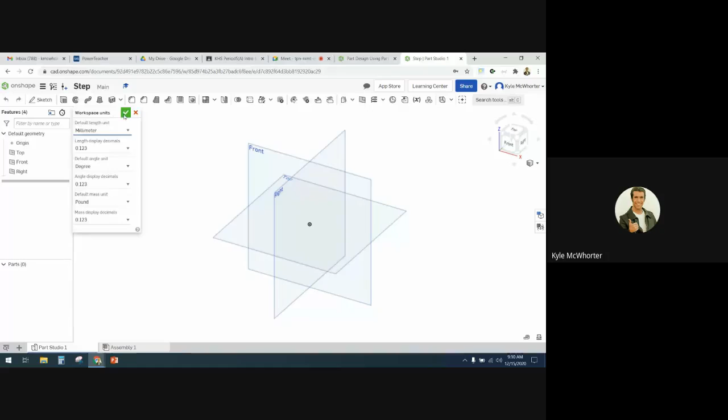And then I'm going to create a new sketch on the top plane. So top plane, new sketch. I'll push N for the normal view. And next slide.

So next we're going to sketch a center rectangle whose center is coincident to the origin. And then we're going to create a construction line diagonally from the bottom left corner to the top right corner. And then we'll add these dimensions. Then we will accept the sketch, make sure it's fully defined, and rename it main sketch.

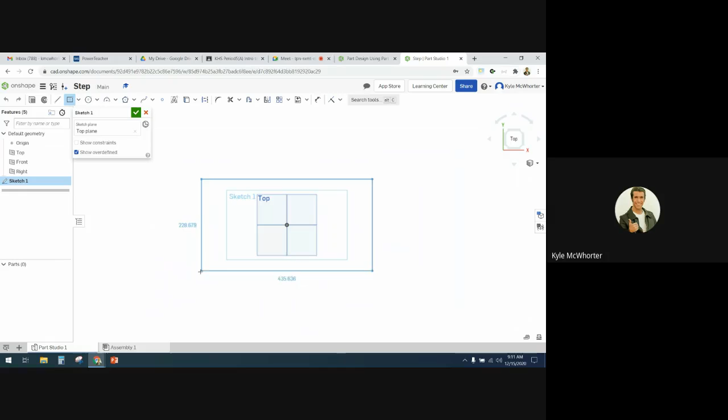Okay, so center rectangle. That's going to be in my little drop down, center point rectangle, or you can use R. So click on the center, then drag to make your rectangle. All right, there's my rectangle. Then I'm going to make a construction line that goes from the bottom left corner to the top right corner.

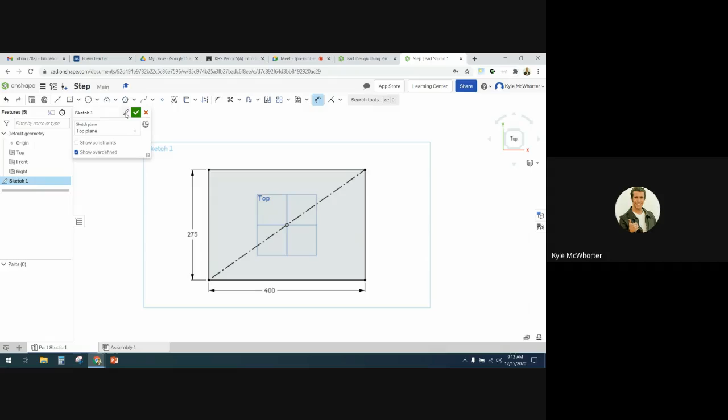And then I need to put some dimensions on there. A height of 275 and a width of 400. 275 there. 400 there. And everything is defined. So I am going to accept the sketch, but rename it main sketch. So I'll rename it main sketch and accept.

Next, we're going to do an extrude from the rectangle sketch. Make sure it's a new part. We're going to select the rectangle. We're going to do a blind end type, a depth of 40 millimeters, and then we're going to do a 5-degree draft, and we want it to be drafted so that the top is smaller than the bottom. Okay, so let's do this. 40 millimeters blind with a 5-degree draft that makes the top smaller.

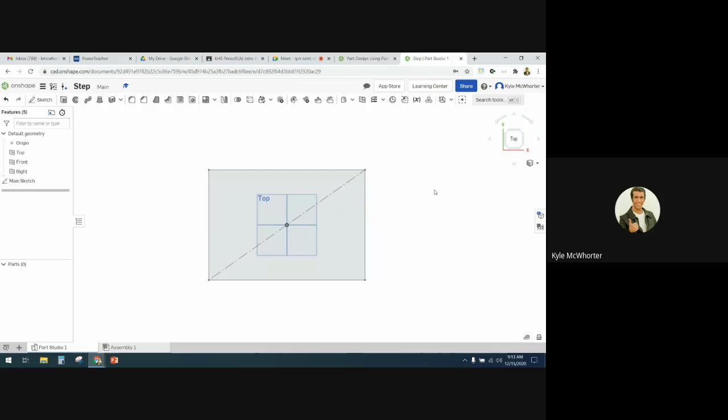Okay, so back over here. Hide these. I'm gonna do an extrude. It's new, it's blind, it's gonna be 40 millimeters. What face? This rectangle. And I'm gonna do a draft of 5 degrees.

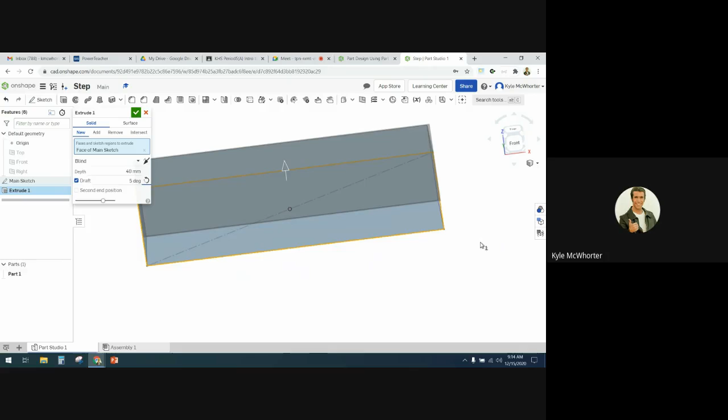And then if I'm looking at the preview right now, the top is up and the top is bigger. We wanted the top to be smaller. So I need to hit this to reverse the direction of the draft. So now it's drafting inward so that the top is going to be a little smaller than the bottom. Just check and make sure we got all the things we needed.

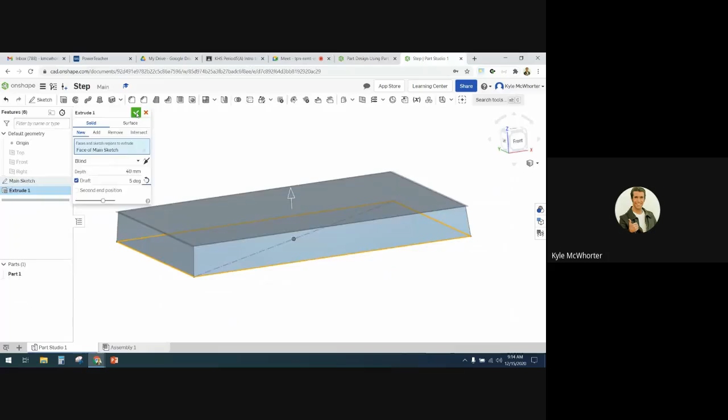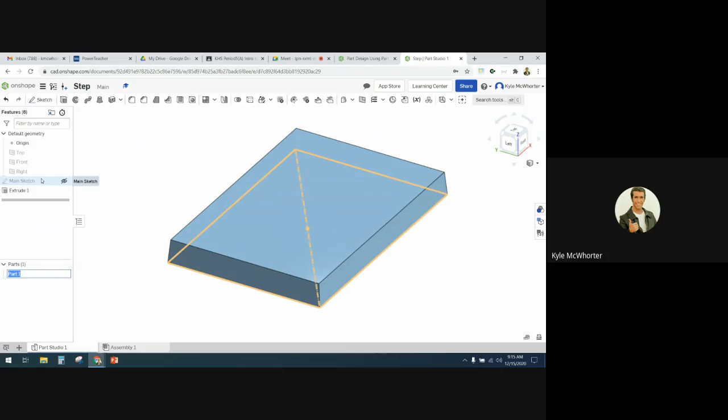So I am going to accept the feature. So now, if we look at a straight on front view, you can tell that the top is a little bit smaller because of the 5-degree draft. All right, what's next? We're going to rename, instead of part 1, we're going to call it step. So we're going to right click on part 1, rename, step.

Next, we are going to fillet the 4 vertical edges of the step with a 15 millimeter radius. So just the 4 vertical edges there. So I'm going to get my fillet tool. It was a 15 millimeter fillet. And then I'm going to select the vertical edges. Then I'll have to rotate my view to get to that last edge. Got those 4 edges selected. So I'm going to accept that fillet.

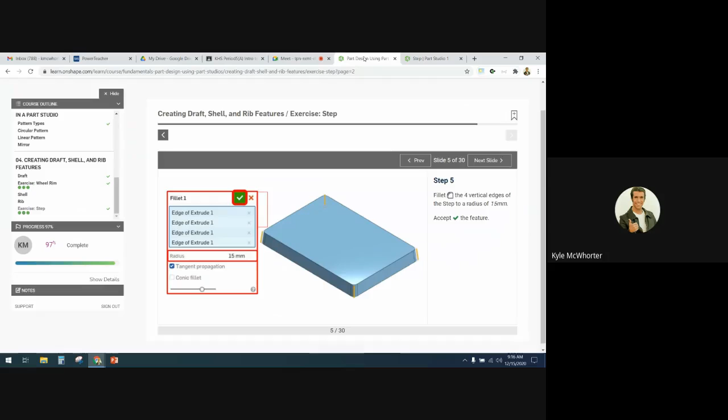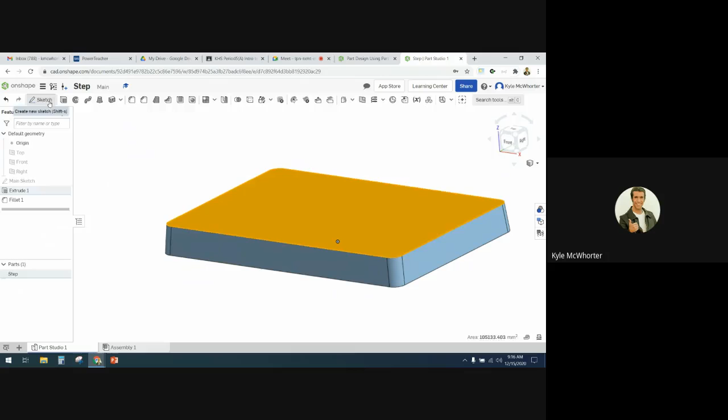Next, we're going to make a cut on the top face so that we can make a pattern for the traction. So we're going to start a new sketch on the top face of the step. So I'll click on the top face, then click on sketch, and now I have a sketch plane on that top face.

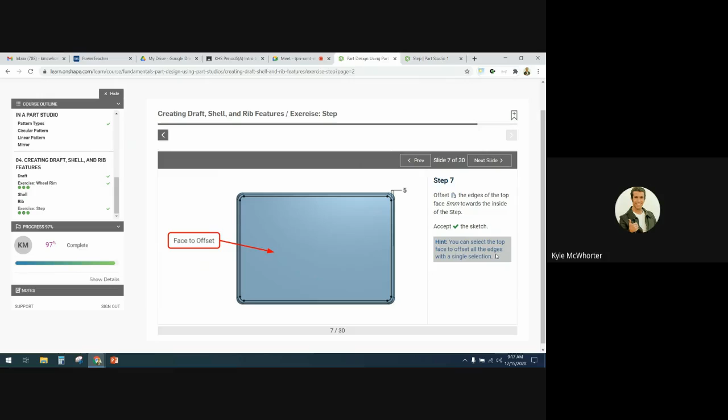Next, we're going to use the offset tool to make an offset 5 millimeter towards the inside of the step. And their hint is you can select the top face to offset all the edges with a single selection. Okay, so here's the offset tool. Click on offset, and then you can click either on individual lines, or you can just click on the whole face, and it will offset basically that whole edge all the way around.

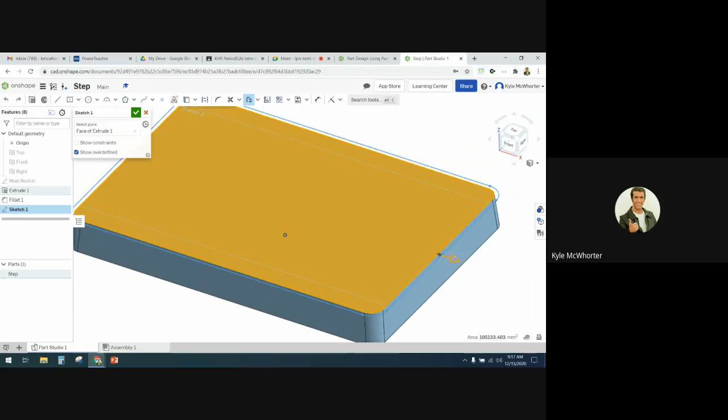Right now it looks like it's offsetting to the outside, so I want to switch the direction. So I can click on this little arrow right here, and it will change the direction. And then zoom, and it looks like it's already 5 millimeters. So we're good there. So we've got this offset, the outside edge here, we offset it in 5 millimeters. What's next? Accept the sketch. I accept you, sketch.

Next, we're going to do an extrude to remove the profile from our last sketch. We're going to cut it down 5 millimeters deep. Make sure we have the merge scope set to step, 5 millimeters deep, it's blind, and we need to set it to remove.

So now we're going to do an extrude. We want to remove. The depth is only 5 millimeters, and the face we're going to extrude uses this sketch right here. When I select the whole sketch, it looks like it includes the outside edge too, so I'm just going to select the inside edge.

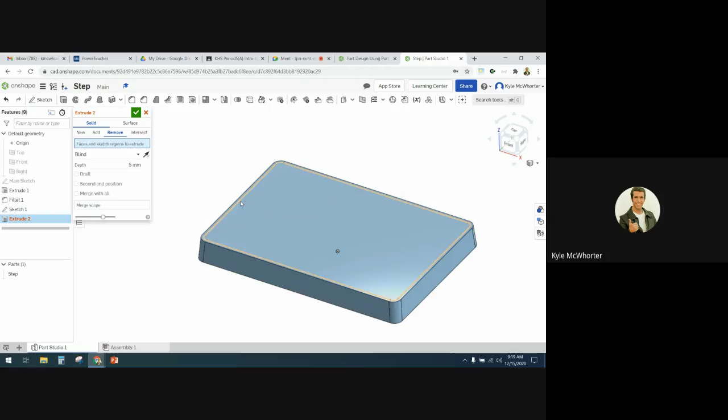So that gives me a preview. It looks like it's cutting it down correctly, with a depth of 5 millimeters. Merge scope is step, so I think we're good. Let's double check. Yeah, so we can accept that.

Next, the step is going to be manufactured as a plastic part, so we need to hollow it out and have a constant wall thickness. We can use the shell feature to do that, and we set the wall thickness to 2.5 millimeters. Make sure we're removing the bottom and not the top.

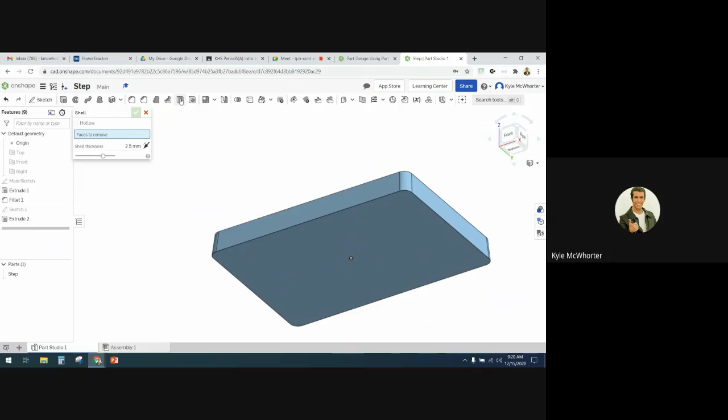Rotate it so that we see the bottom. Then here's the shell function. What face do I want to remove? The bottom. How thick do I want my shell? 2.5 millimeters. And now we've got the bottom of the step shelled out like that.

Next, we're going to create ribs for traction on the top step. So we're going to create a new sketch on the indicated face, which is the top edge, the very top face of the step. We're going to create a sketch plane there.

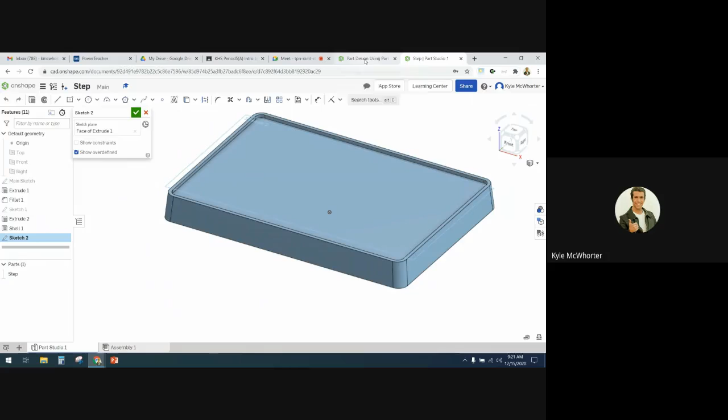Okay, I want to get my view rotated back to somewhat normal here. Here we go, there's top, front, right. I'm going to zoom in so I make sure I'm selecting the top edge there. I'm going to make a sketch plane on that edge, and then I'm going to just sketch a little line.

I want to show my main sketch and add dimensions. I need to use the main sketch to refer to things for my dimensions. Like this angle is going to be to the horizontal edge here, a 45-degree angle.

The 22 millimeter dimension is between the end point of our construction line and the line here. We've got to make sure we do that dimension from this point to that line, because if we click on this point and then that point, you could be measuring in a different way that lets this point be further away. So when we do this dimension, the 22, we need to click on the dot and then the whole line.

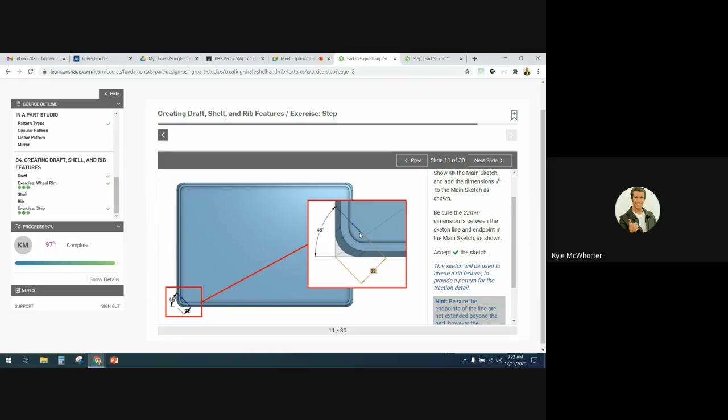Okay, so we need to make a little line. We need to show the main sketch. So I'm going to get this view, zoom in a little bit, show the main sketch, and make a little line.

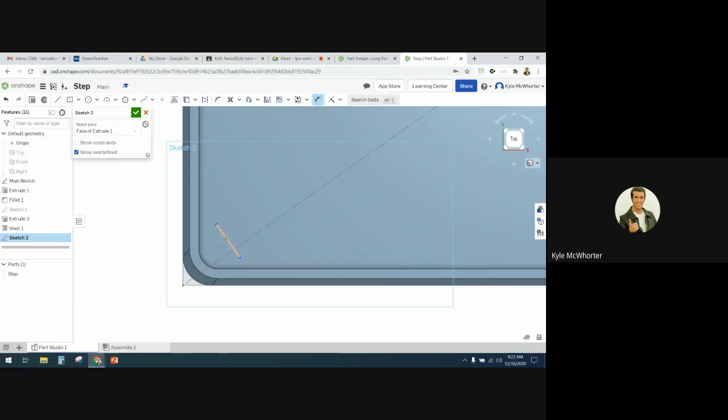And then I'm going to put some dimensions. I'm going to say I want the angle from this line to that line, the angle between those, to be 45 degrees.

And then I'll try to demonstrate what I was talking about before. If I put the dimension from this point to this point, am I just measuring how far they are from side to side, or how far they are in this direction? What direction is it in? And then when I place that dimension, does it do what it was supposed to do?

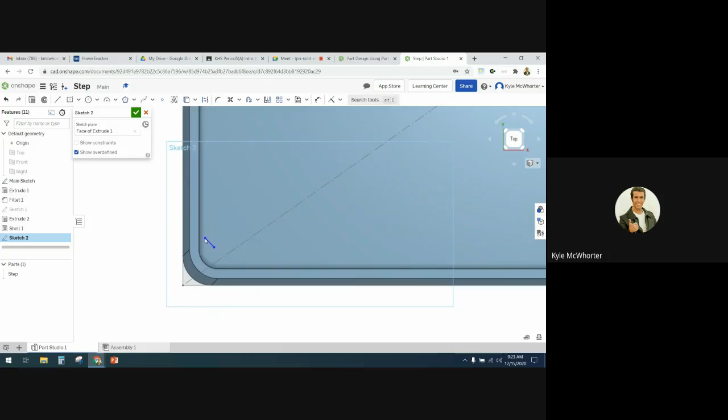Like right now, I can move this way far away. It's not stuck, because only this point here has to be 22 millimeters to the right of that point. So if instead of doing that dimension like that, I say I want a dimension from this corner point to this segment, then it will choose the perpendicular distance, and that's the one we set at 22.

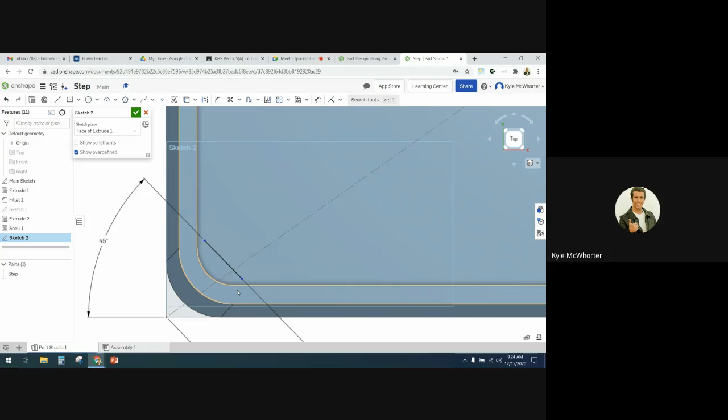And now you can see that point can't really move the line segment. All I can do is stretch the end points. But the angle and the distance away for that line are already locked in, because we did our dimensions right. So make sure that you dimension from the point to the line.

Okay, so now this is going to be a little weird because we're going to accept this sketch even though the line isn't fully dimensioned. The length of the line doesn't matter in this case, because we're going to use a rib feature that just uses this line as a reference for where to put a rib. This hint down here says be sure the endpoints of the line do not extend beyond the part, because otherwise the rib would go on forever. But the endpoints don't have to be fully defined, they just need to be inside, between the lines.

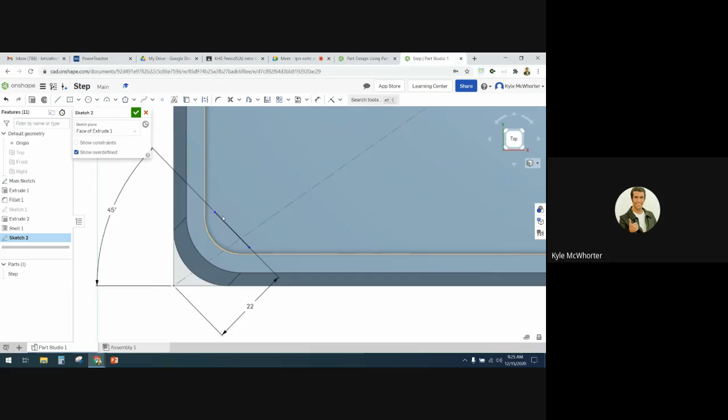Okay, so that works. I've got my points in between the lines, so I can accept that sketch.

Next, I am going to create a rib feature. I'm going to select the sketch that we created in the last step, which is just that little line. The thickness we're going to set to 10.

So right here, 10 millimeters. Choose step as the part to define the rib. Make sure we select normal to sketch plane. So it's either going to be normal to sketch plane or parallel. And we want normal for this one.

And then the last part is to check extend profile. So we'll kind of watch what each one of these things does. So I'm going to go and click on the rib feature. The sketch profile that I want to use is this line. The part that I want it to go to is step.

And then you can see that right now it's trying to shoot it out parallel to the sketch plane. So it's trying to go that away. But we want it to go normal to the sketch plane. So now it's making that rib go down to the part.

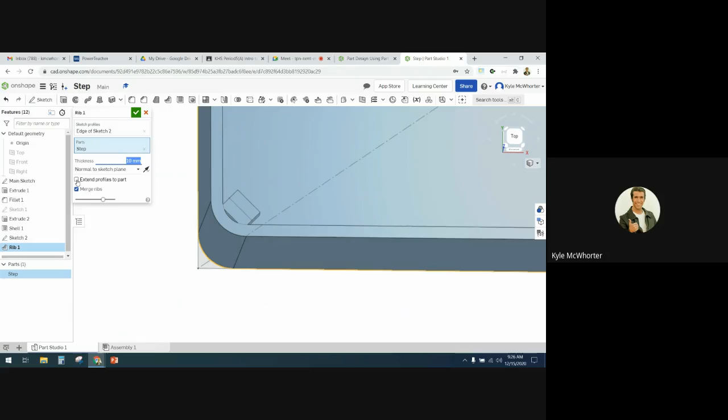We want the thickness to be 10 millimeters. And then when we click extend profile to part, it will make these ends go all the way to where it runs into the part. So when I click on that, it will go all the way over to that.

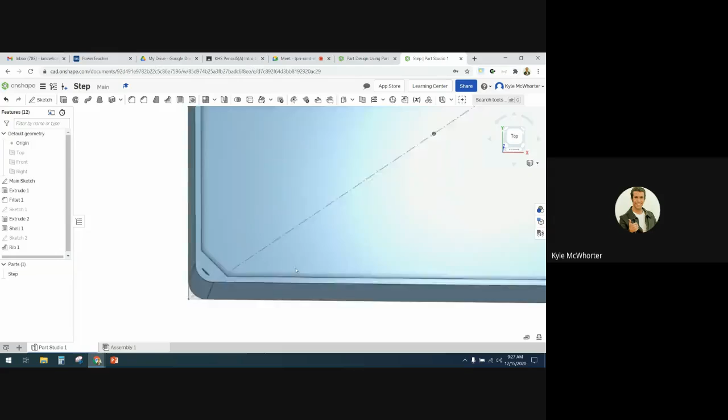Make sure that merge ribs and extend are both checked. All right, let's accept that. So now we got one rib.

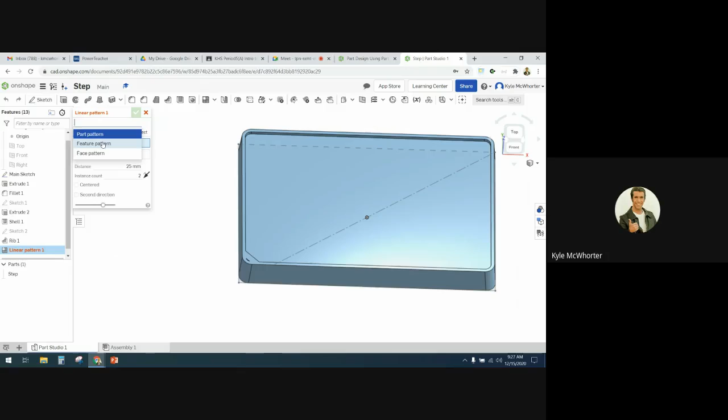Next is the moment of truth. We need to use a linear pattern. Be sure to select a feature pattern. So when we first select the linear pattern, it comes as part pattern, but we want to pattern a feature. So we need to select feature pattern. What feature do we want to pattern? We want to do this rib.

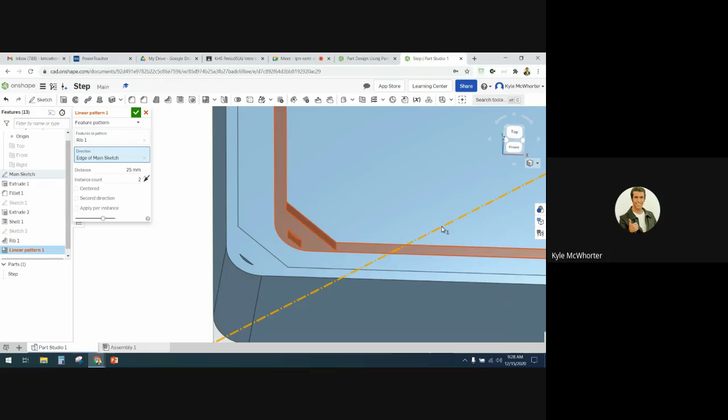No, it picked extrude one. I want to do rib one. The direction, we're going to choose this construction line. Now you see how, okay, it's trying to take the whole entire pattern. If I check apply per instance, that is the one that makes it just taking the rib.

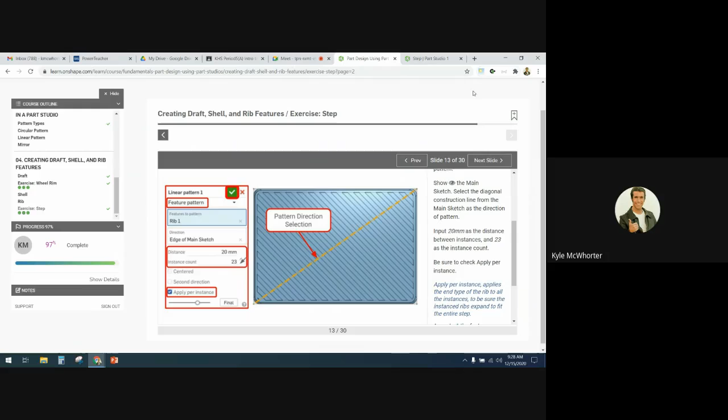The distance, and I go back over here, 20 millimeters for the distance and then 23 instances. So the distance was 20 millimeters and the instance count would be 23. Now we get the ribs. Yay, we got ribs.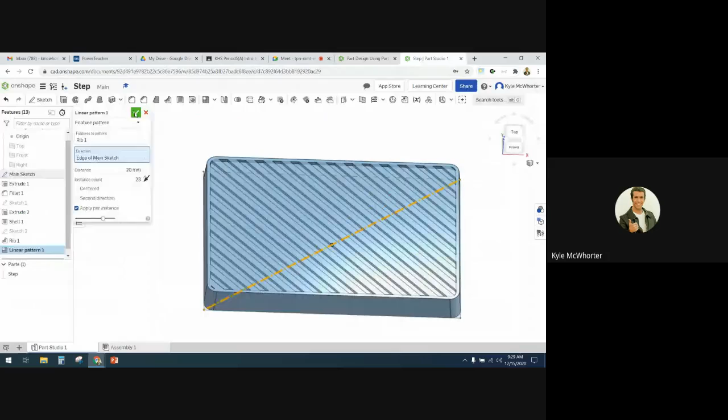All right, I think we are good with that one. Check. Next. All right, now we're going to create ribs to brace the inside of the step.

So now we're going to create a new sketch on the right plane. So I'm going to go create a new sketch on the right plane. So I'm going to go over here, click on right plane, click sketch, and then I'm going to push N, and it'll give me that normal view there.

All right, now we are going to sketch this horizontal line. So the line only goes from the blue dot to the blue dot. This right here, the rest of it, this is just an extension line showing this dimension. So the line only needs to go like from here to here. Then once we put the dimension on it, that extension line will show up. So it's 5 millimeters from the bottom edge up to where the line is.

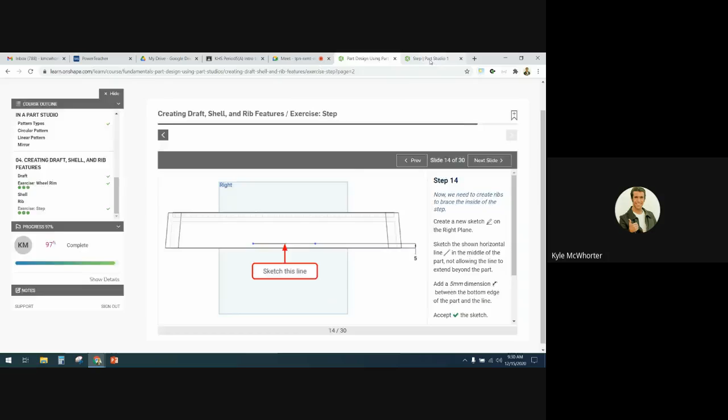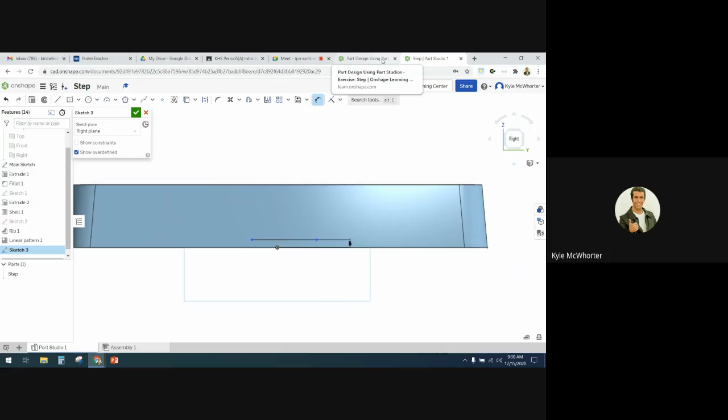Okay. So I'm going to get my line tool. And I'm just going to make a line, make sure it's horizontal. And then I'm going to dimension it and say this thing needs to be 5 millimeters from the bottom. So now we've made this line. Then we accept that sketch.

La la la la la. That's good. So we accept it. We just accept that sketch.

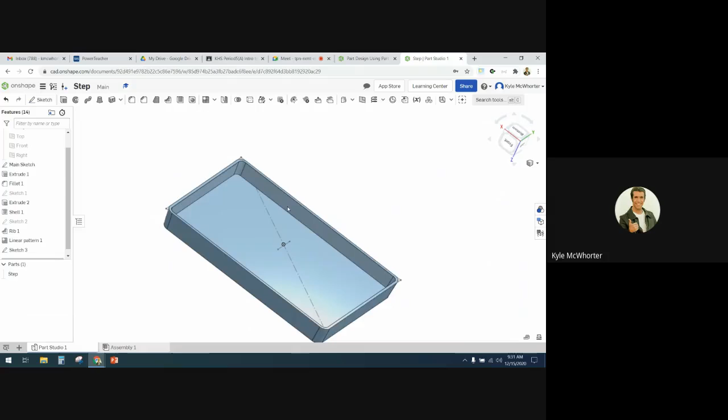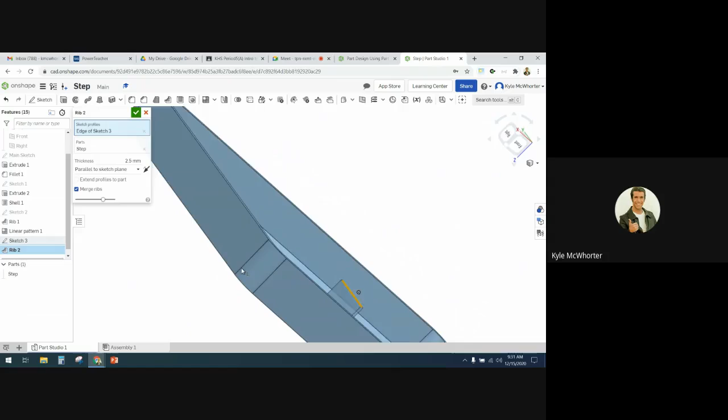All right, so next we're going to make a rib feature using that one little line. So let's flip this over. I hide the main sketch for now. But I want to take that line right there and make a rib. So rib. Then click on sketch profile will be this line. So right now this is from that line going straight down to the part.

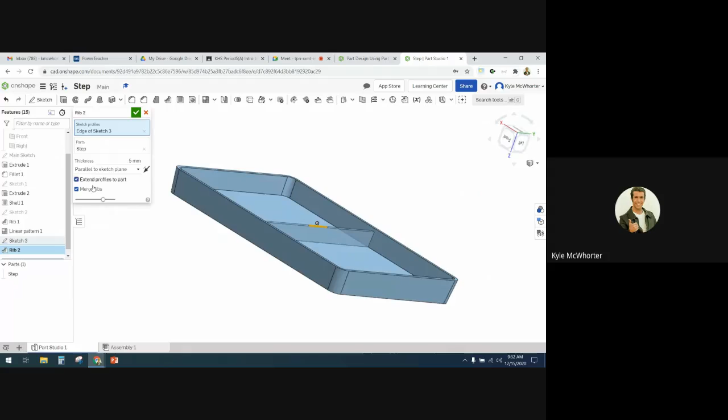The thickness be 5 millimeters. And we want to choose, this one's going to be parallel to the sketch plane and extend and merge. Okay, so the thickness was, I already forgot, 5. And extend. And now we've got this rib that goes all the way across.

Click extend profiles and extend the feature. Okay, so now we can accept that.

Next, we're going to do a draft on the rib. So we'll pick the top or the bottom edge here as the neutral plane, and then the sides as the entities to draft, and then the draft angle will be 5 degrees.

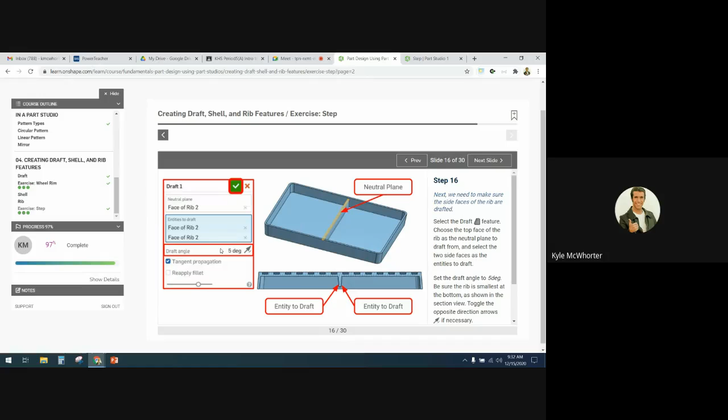Okay, so draft. The neutral plane will be this top part of the rib. The entities to draft will be this side here and that side there. And it's supposed to be 5 degrees. And it looks like it's going the right way. It's making it wider at the top.

So, ding. And then if we take like a bottom view, you can tell that it gets bigger towards what is the bottom on this view. Okay, so what's next?

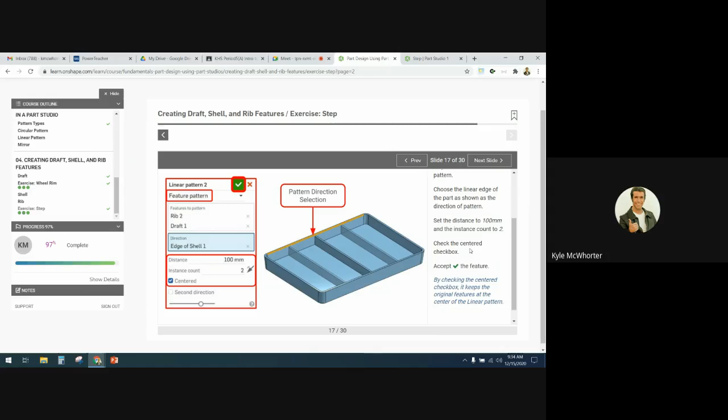Linear pattern. We're going to select linear pattern, select the rib and the draft from the menu on the left as the features to pattern, choose a linear edge of the part as the direction of the pattern. Set the distance to 100 millimeters, the instance count to 2, and check the centered checkbox.

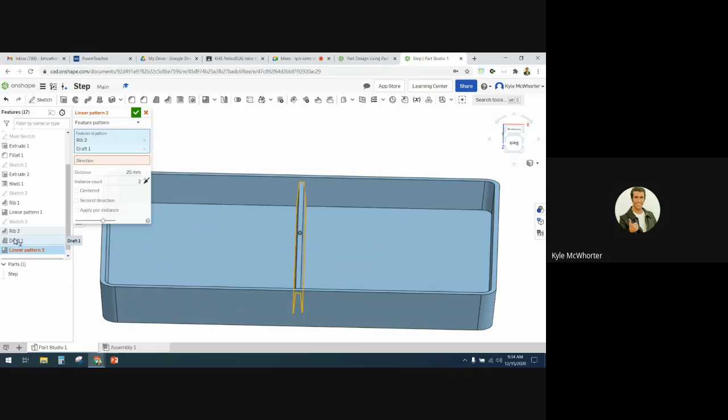So, the linear pattern feature. Instead of part pattern, make sure it's feature pattern. What features are we going to pattern? We're going to do the rib and the draft. What direction? We're going to use one of these lines going in that direction. Distance 100. Instances 2 and centered.

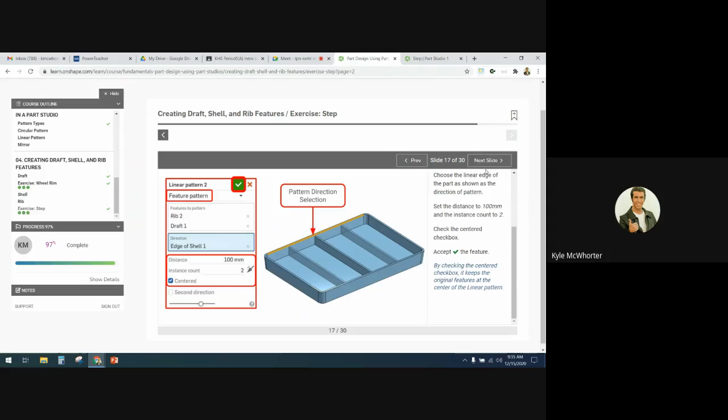And then, I think that's it. That's it for that one. We accept that feature.

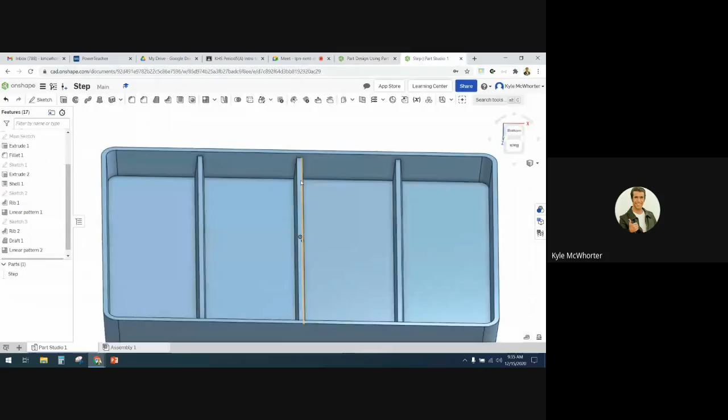Now we need to do 2 ribs along the other direction. So we're going to select the sketch plane to be the top of one of these ribs and make a sketch. So select that, make a sketch.

So now we're going to sketch some lines. We've got a construction line that goes through the origin. Be sure the origin is the midpoint. The construction line and the 2 solid lines are symmetric about the construction line.

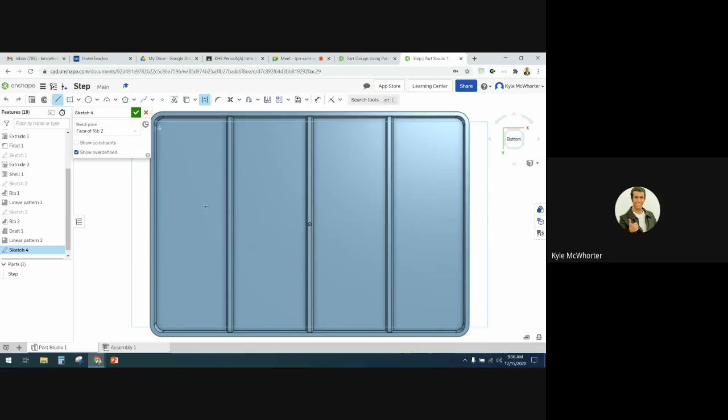Okay, so some lines. This bottom view, get my line tool. I'll do the construction line first. Now, something they don't tell you in the instructions is that the 2 lines you make need to go past the last rib on each side. So they need to be in like the far left quarter and the far right quarter. Otherwise, when you do extend to part, it'll just go out to the next part that it hits.

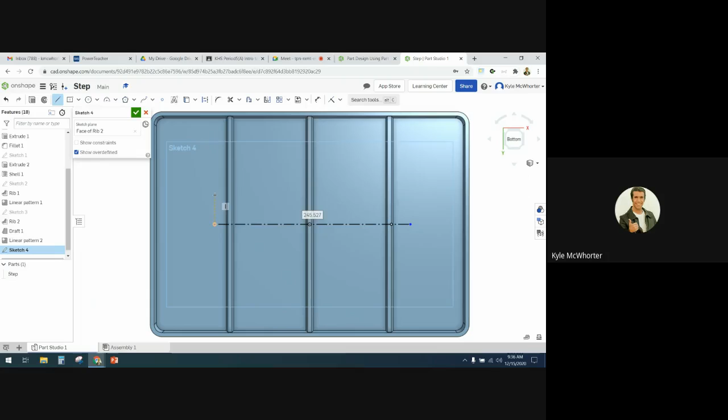Oh yeah, I'm gonna do a couple, and I'm just gonna make them all the same length. Make sure they're horizontal.

Now I need to put some of these constraints on them. So I want this - click on all 3 of them, and then you can hit the symmetric constraint. And then that will force the lines to mirror each other on either side of the construction line.

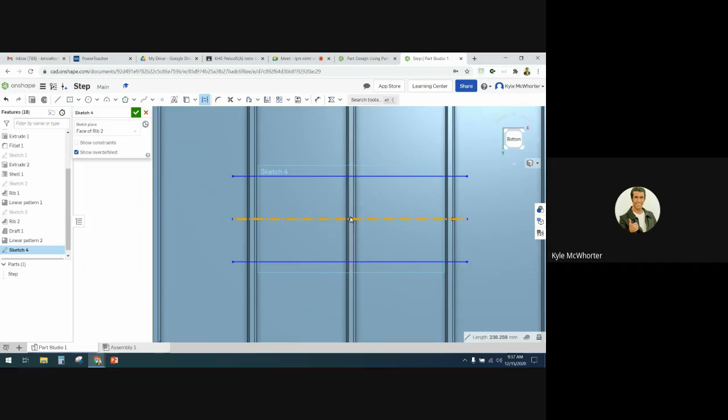I don't know if this is really that necessary, but it said to make the origin like the midpoint or something. And then I think the last thing was a dimension, 100 millimeters between the lines.

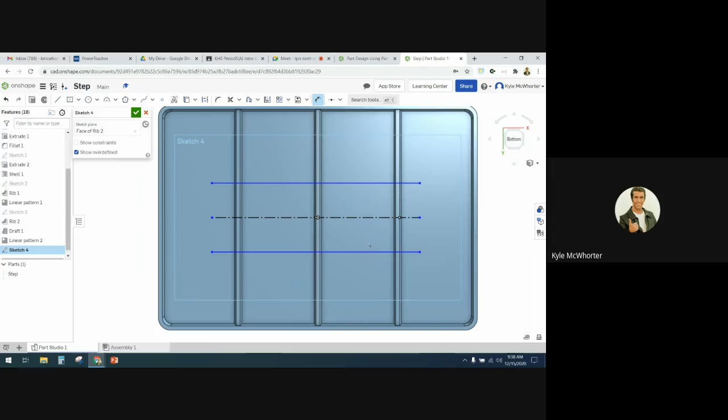And then we can accept that sketch.

Okay, next what we're going to do is we're going to use that sketch to make ribs. So we're going to do extend, merge, and normal. Okay, so rib.

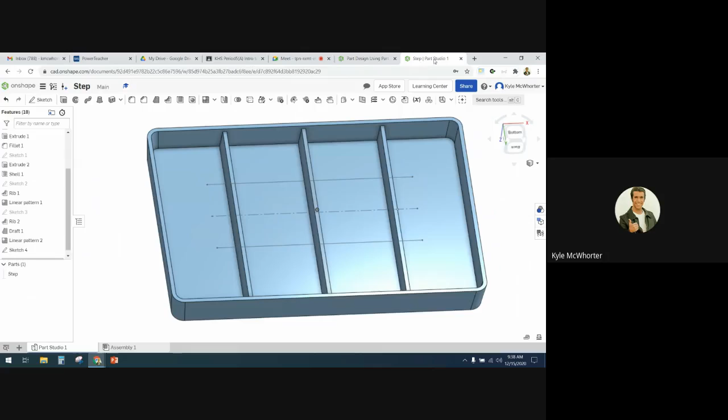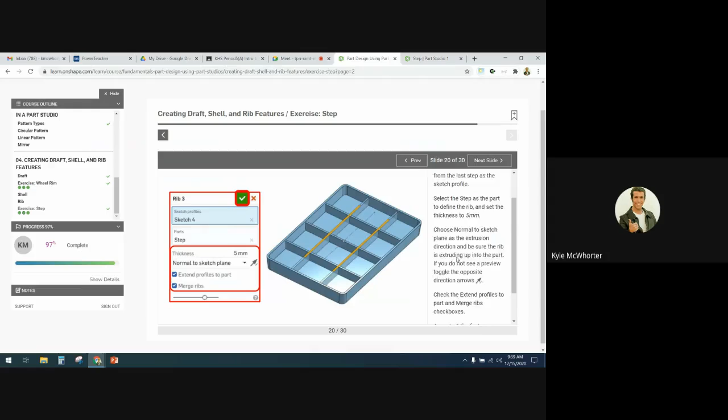We can select sketch 4. The part will be step. It needs to be normal and extend. And the thickness is 5, I think. Yes. All right, so we checked all those boxes.

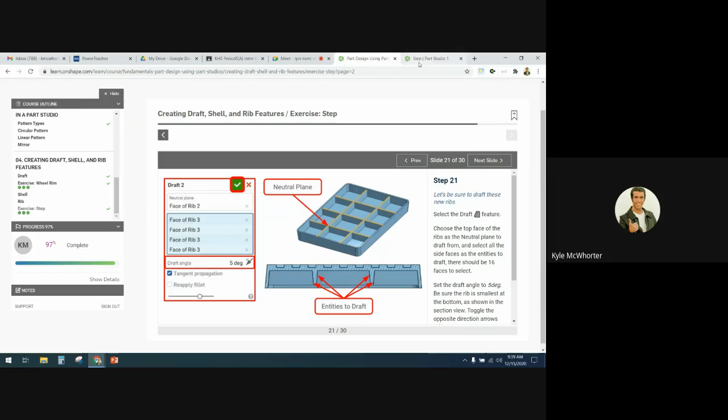All right, now this next one, when we put the draft on, this one's going to be a little bit tricky, because we have to select each one of these little things individually. So to do this draft, it's going to be a 5-degree draft. Our vertical ones here already are drafted, but our horizontal ones need the drafts. So we need to draft here, here, here, here, here, here, here, and here.

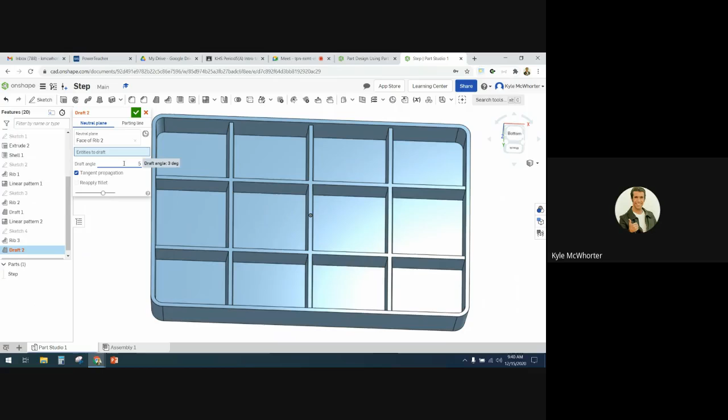So I'm going to do draft. The neutral plane is this top part. Draft angle is 5 degrees. Entities to draft: 1, 2, 3, 4, 5, 6, 7, 8. Then I gotta whip it around.

9, 10, 11, 12, 13, 14, 15, 16. 16 of those face of rib 3s. So now if we get a straight on bottom view, you should be able to see the draft on all of those ribs.

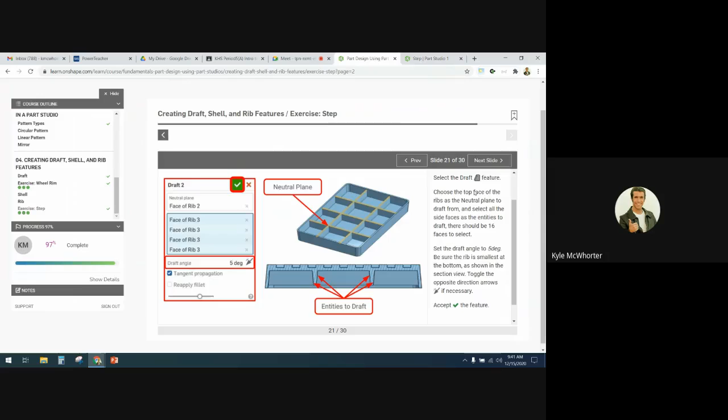Alrighty, next we're going to create a couple of holes on the side of the step. So we're going to make this our sketch plane. Top, front, right. Okay, so I am going to go top, front, right. So this is going to be my sketch plane here.

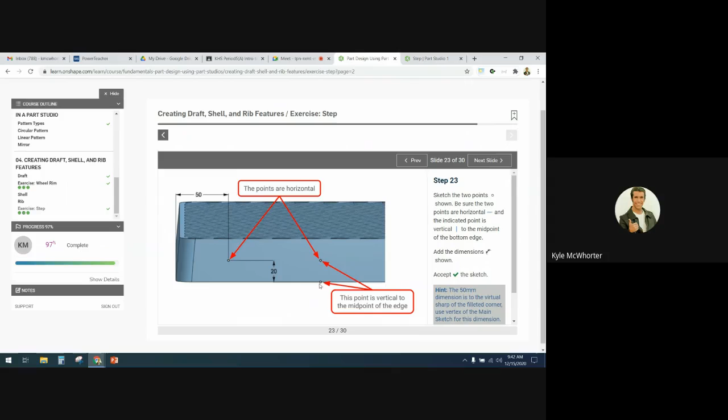Next, so we're going to sketch 2 points and then make sure they're horizontal to each other. This one is vertical to the midpoint of the edge. Okay, so I'm gonna push N on my keyboard to get this normal view. No, I'm gonna click right so I get that right side view straight on.

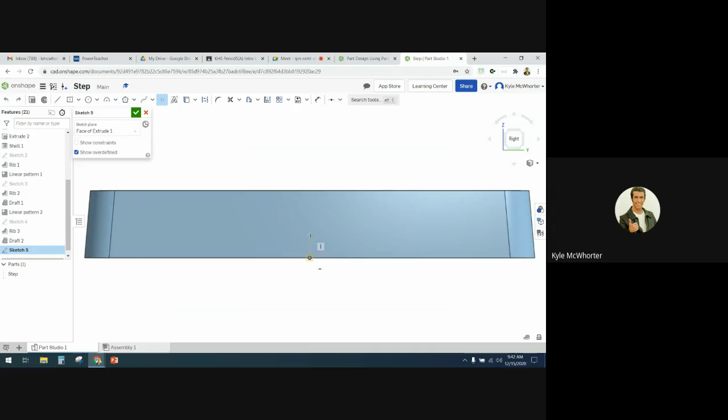So then right here, there's a button where you can put points. And if you hover over the origin and then move up, or the midpoint there, place your point. Now that one is constrained to be above there. And then if you just go out sideways with a line, make sure that yellow line is there, and click, and those will have the horizontal constraint on them.

So I just hit escape from there, so I can drag these around, but the 2 dots will always be horizontal to each other. And did you see what it just did? How that guy turned yellow? It made a vertical constraint with the midpoint over here.

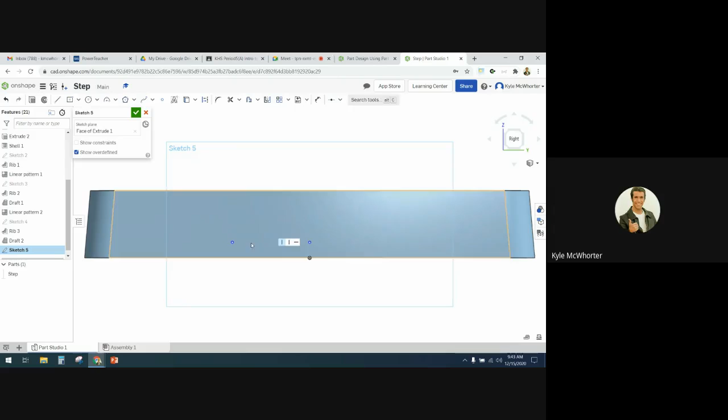So I need to Control Z to take that off, because this thing needs to be able to move up and down. I can't move it side to side though, because it's staying vertical above that midpoint. So now I just need to see what the dimensions are. 20 up and 50 from the corner.

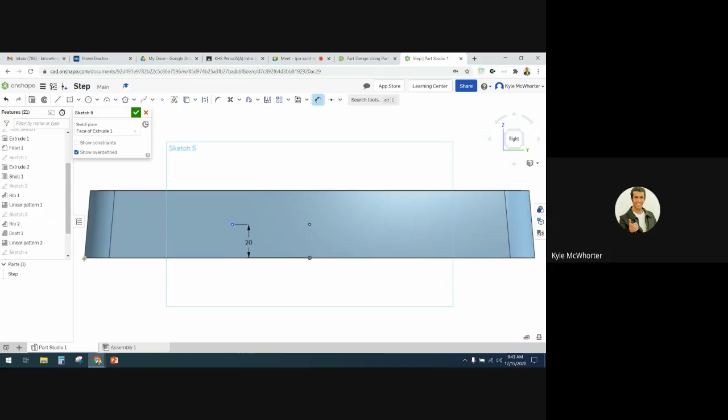So dimension tool. From there to there is 20. From here to there is 50. Now the points are locked into position.

Accept the sketch. I accept you, sketch. All right, so now we're going to use the hole feature. So we're going to click hole, and then we're going to kind of work through all these little boxes. Okay, so here's the hole feature button.

I was not talking to you, Alexa.

So the first one is simple and then blind. So we've got simple and then blind. Okay, good. ISO, clearance, M10, normal. ISO, so it might start off as custom, but switch it to ISO. Clearance, this starts off usually at M5, I think. You want M10. The fit is normal.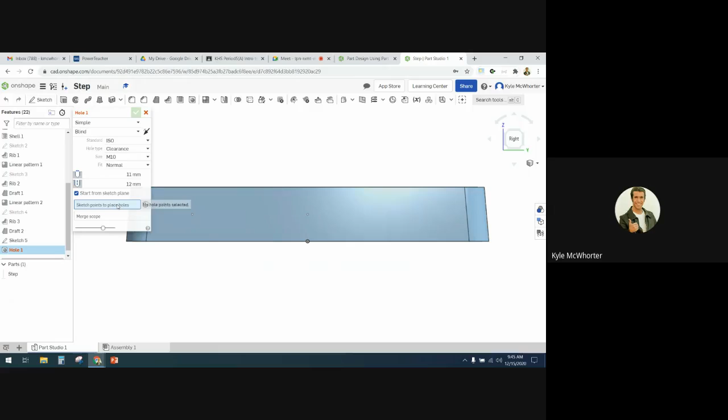Now sketch points to place holes, and we're going to pick these 2 points. So sketch points to place hole, boom, and boom. And then what's the merge scope? The merge scope is step. All right, I think that we're good there then. So I then select, accept that, and boom, I got those. All right, what's next?

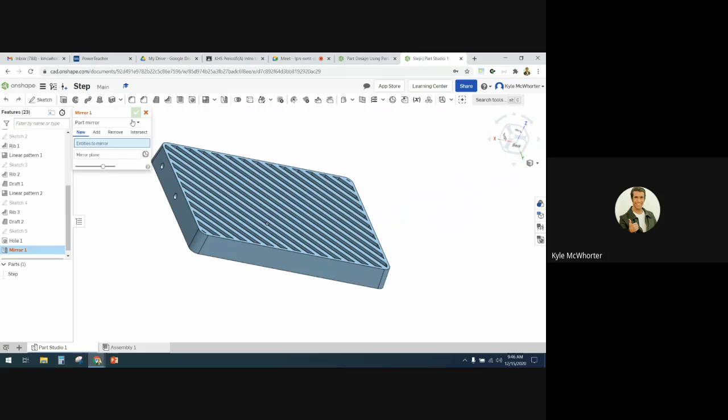Next, we need these holes on the other side of the part too. So we're gonna mirror the feature. So we're gonna come over here. So right now, this side is blank, right? We need to copy those holes over to there. So we're gonna click the mirror, and then entities to mirror, we're gonna select hole 1 from the menu over here. Oh, see how it says part mirror? I have to switch it to feature so that I can select features.

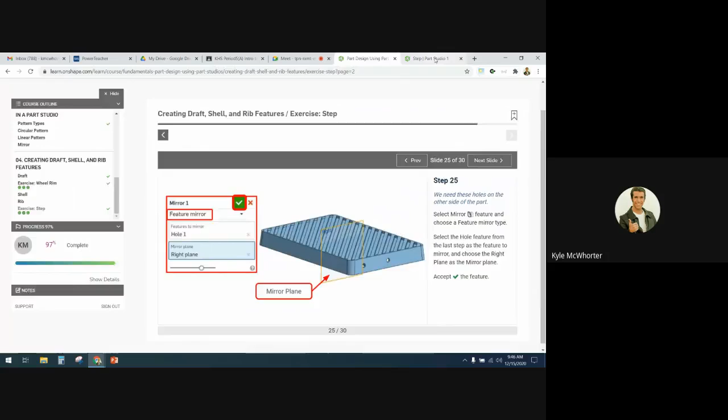Then the mirror plane, I think, is gonna be the right plane on this one. Let's check. The right plane, yeah. I'll show it to show where it is. So the mirror plane is the right plane. So now it's going to mirror the holes onto the other side. I accept.

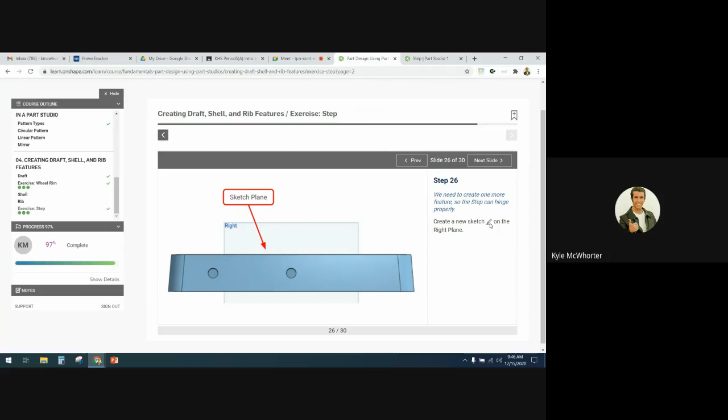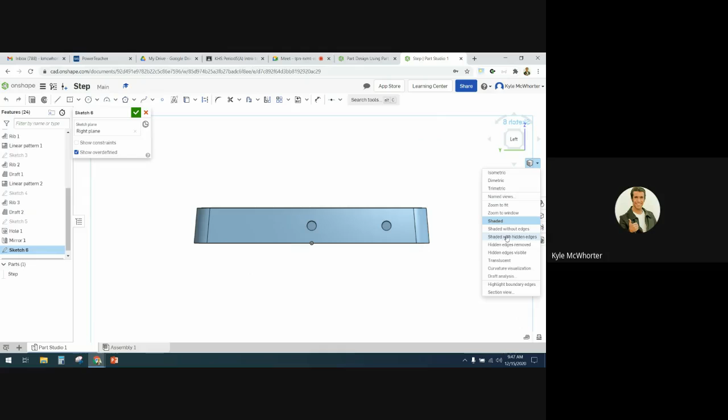We need to create one more feature so the step can hinge properly. We're going to create a new sketch on the right plane. So I'm just going to select right plane here, then click on sketch. And then I'll hit N to get my normal view. So we can make it look like this if we want to by using the view tools. So right here, or is it this? Hidden edges visible. There we go.

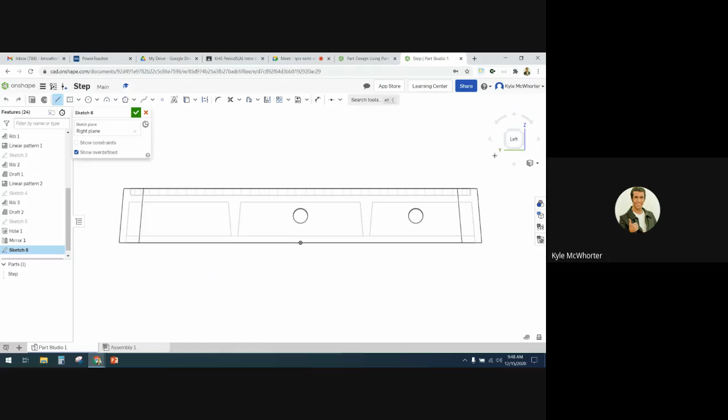All right, so now we are going to make this sketch with line and arc. We're going to cut this part out here. Okay, so I need my line tool. Where is it? It is on the side. Ooh, you know what I'm going to do? On my sketch right now, there's not a line down here. So I'm going to get my line tool and I'm going to start here. And I'm going to go down until I'm there. Go over to the right some. Then I'm going to go up vertically until I reach that point.

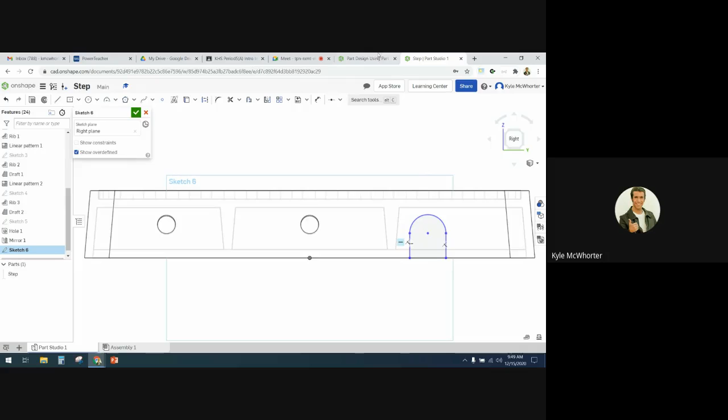And then I need to get my arc tool. And if I do that, there'll be tangent. So I do want that. So I'm going to click that. So now those are set up to be all yummy. And since I made a line down here, I don't have to do this other part where they say project the bottom edge, whatever. I just made my own line there.

Okay, so dimensions. The center is 50 from that edge. So from this corner to the center was 50. The radius of the arc was 12. And the height was 15 there. All right, so we're all fine there.

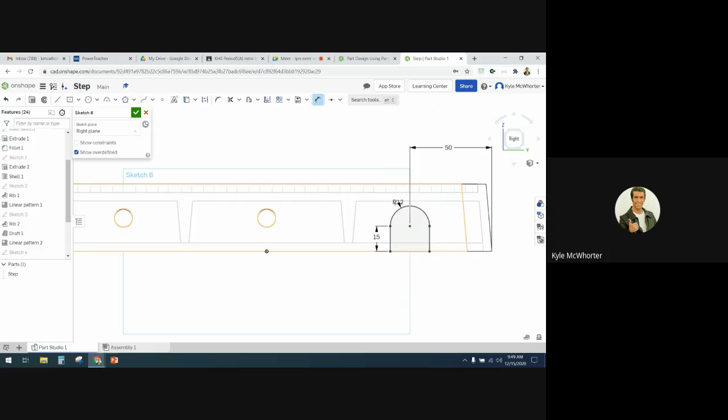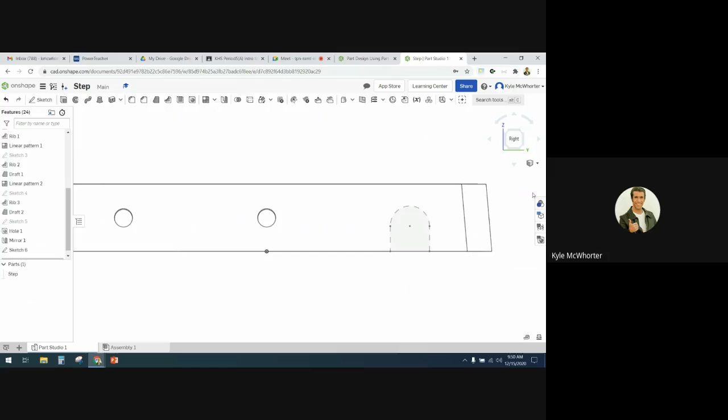So now we're going to do an extrude, remove. We're going to use the sketch we just made through all in both directions. So we need a second end position with another through all. Okay, I'm going to change my view back to... I don't know how to undo that. There we go, shaded. Alrighty, now we're going to do an extrude. I'll flip it over so we can watch the extrude happen.

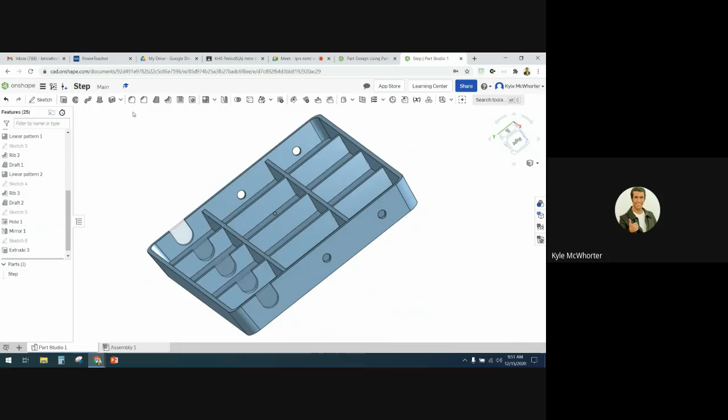All right, we are going to do an extrude where we remove. We're going to use sketch 6. Instead of blind, we're going to do through all. Then click second end position. Instead of blind, through all. And so that cut through everybody there.

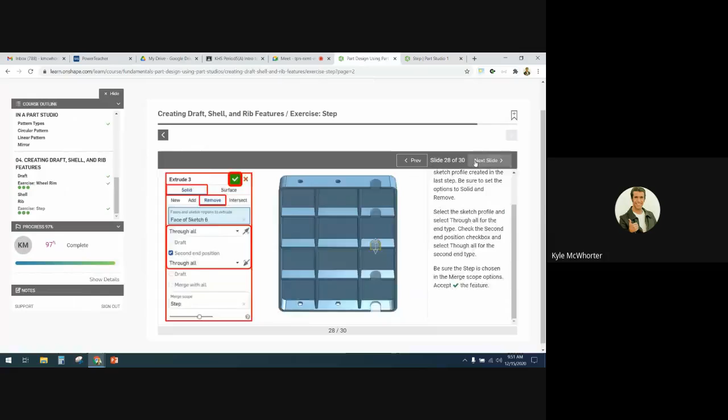And then we're going to assign material, make it out of nylon. So right click here, assign material. Do I have to? Nylon.

And then you can check your mass properties, and they want to know kilograms. So you just hit your mass properties. You'll have to change that to kilograms. So that's up here. Workspace units, mass, kilograms. And done with your part.